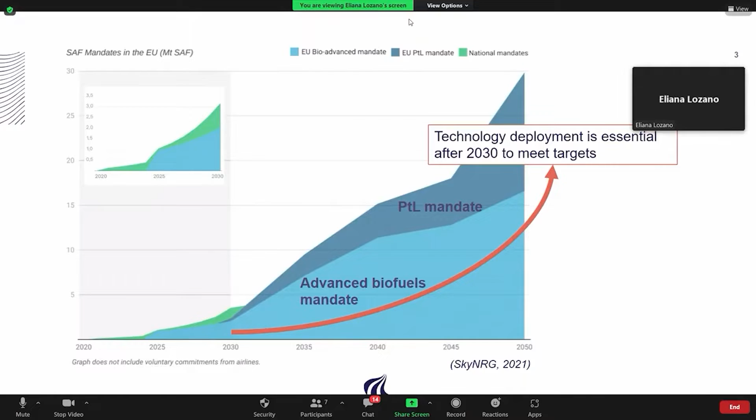Advanced biofuels being used as transition fuels, and also the power to liquid fuels are going to be there. But the challenge right now is that there are not too many advanced biofuel technologies that are at a commercial scale, at a commercial level. So there are quite some at the demonstration scale. And the challenge is then to bring these technologies up to commercialization.

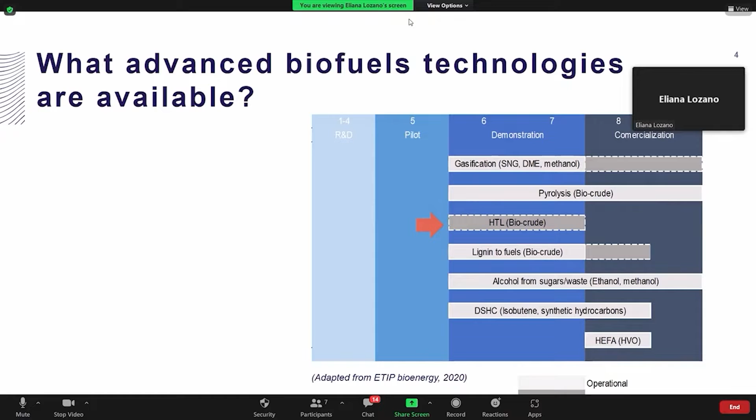So I'm going to talk about the HTL technology. This is hydrothermal liquefaction. Very briefly, it comprises two main steps. So we start with the biomass, and for my PhD, I work mainly with forestry residues and sewage sludge. In HTL, we have the presence of water, and we use it at very high temperatures and pressures to produce a biocrude. And therefore, we need hydrogen to increase the quality of this biocrude and to make it suitable to be used as transport fuel.

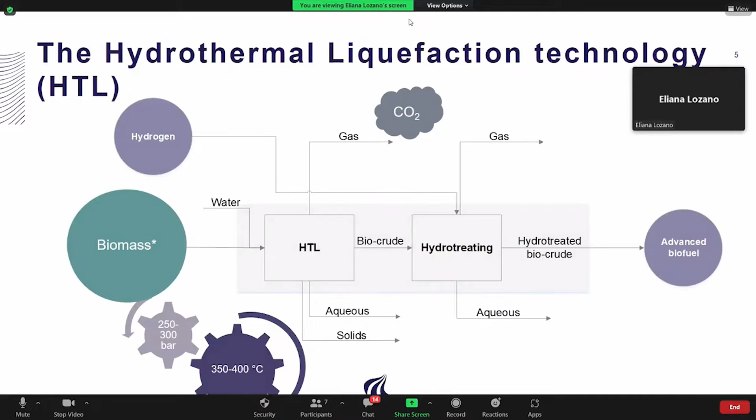So going to commercialization, of course, we're interested in how this technology can be integrated into the system. It's not only about the biofuels, but also other products that we can integrate, such as excess heat, CO2, and also other materials that can be of use. Literature until now on HTL has focused a lot on the biofuel product. So trying to estimate what is the minimum fuel selling price and how competitive it can be with other technologies.

But there is a lack of studies that, for instance, look at the CO2 product, which is an interesting topic for carbon capture and utilization or storage. So we know power to X and negative emission technologies are expected to play a big role in the transition. Also, excess heat from the process can be used for sector coupling. And during my PhD, I'm working on these aspects to see how these other products can have an influence on the minimum fuel selling price. So I'm doing a techno-economic analysis.

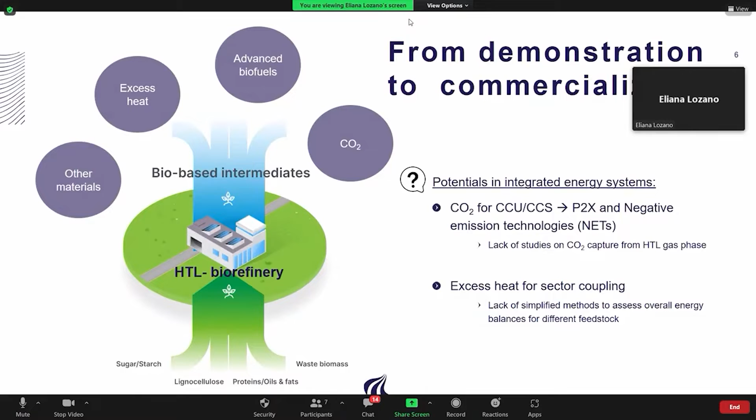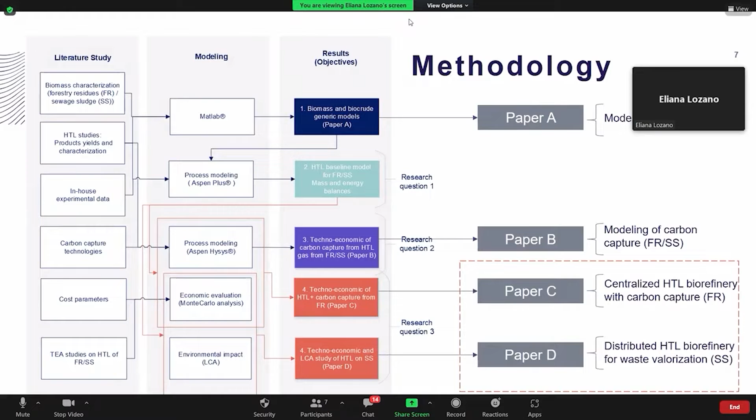So as a result of my PhD, I have four journal publications, 3 of them already published. And today I'm going to tell you more about the last 2 due to time limitations. But these last 2 publications integrate also the results of the first 2 papers. The first one was more in modeling of the technology, the carbon capture step in the second paper, and in paper C and D, I did a modeling of a more integrated version based on the forestry residues and on the sewage sludge. So I will start with paper C.

So as main products here, we have the CO2, and we also use the Selexol technology for cleaning hydrogen, which is needed in excess in the process. So this hydrogen needs to be recovered for the economy of the process. And we also evaluated the production of excess heat. So the main question to answer here was: what is the impact on the minimum fuel selling price and the greenhouse gas emissions of coupling the carbon capture step in the process?

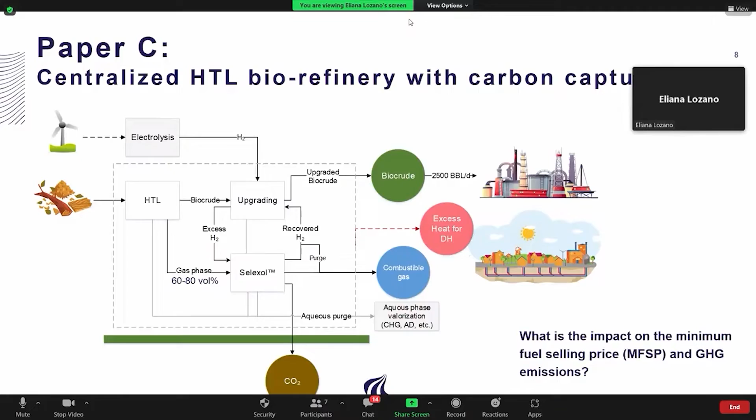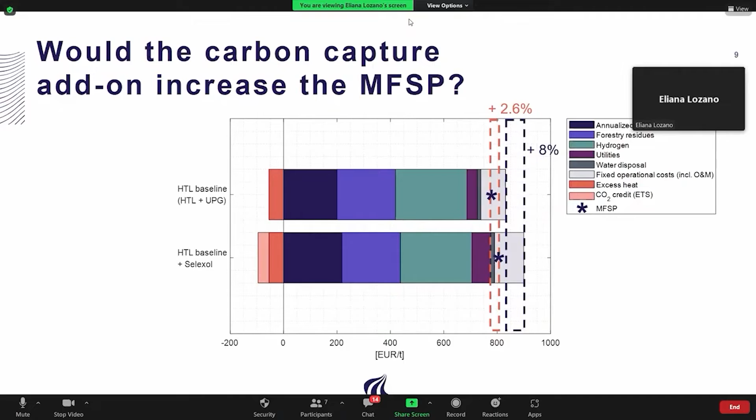However, when we include the revenues from the CO2 credits under the Emissions Trading System, we see that the initial increase that we estimated at around 8% goes down to approximately 3%. So this is, of course, something that is not too bad, 3%, but it depends on the CO2 credits and also how much heat we can actually integrate with the system. This is for a base case.

We look at it also in a range, with different minimum and maximum values for different cost parameters. So the result is an impact between -2 and +5%. So it's still within a 5% increase.

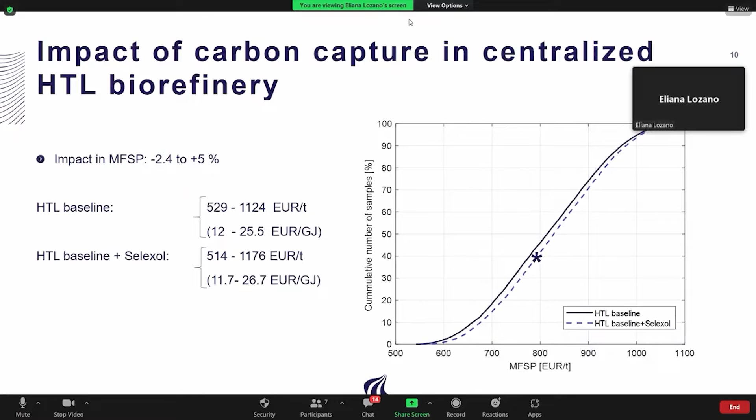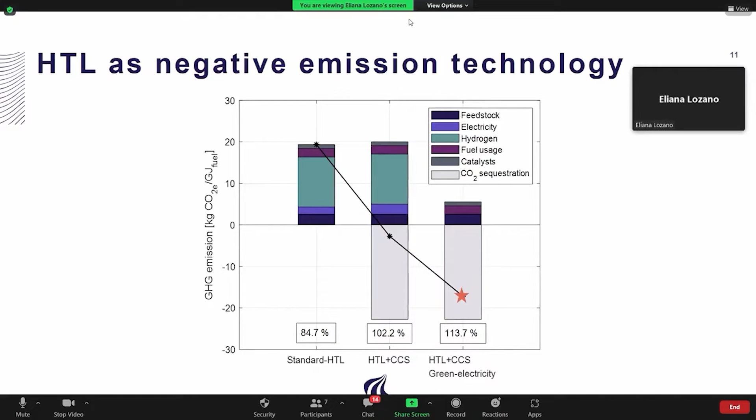And in terms of the environmental performance, we see here for a standard HTL without carbon capture it is in the order of 85%. The big part here is the hydrogen, which still has some contribution due to the electricity emission factor. But in a scenario where we have completely green electricity and we can capture and store the CO2, this technology can perform as a negative emission technology.

The result is also in the same range as what has been published in other papers, even though there are not so many at the moment. We see it's in the order of -20 grams of CO2 per megajoule of fuel.

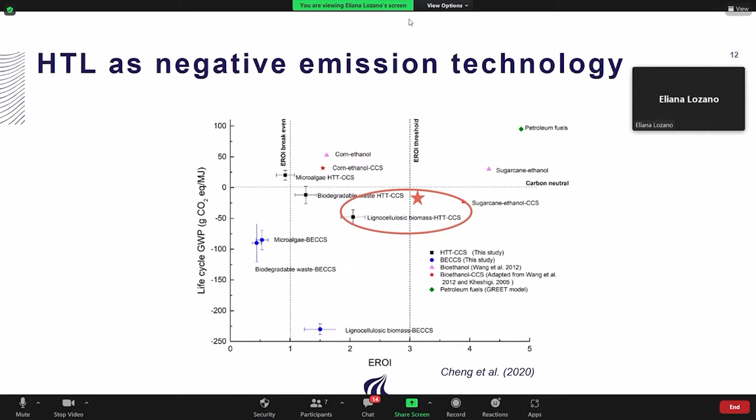Yes, so I'm going to talk about paper D. The last paper is about sludge valorization in an HTL biorefinery. In this case, we look at a distributed configuration of HTL plants, having the Netherlands as a case study, and using the fuels for the marine sector. Again, we look at techno-economic assessment and also environmental performance relative to business as usual, which for this case is mono incineration.

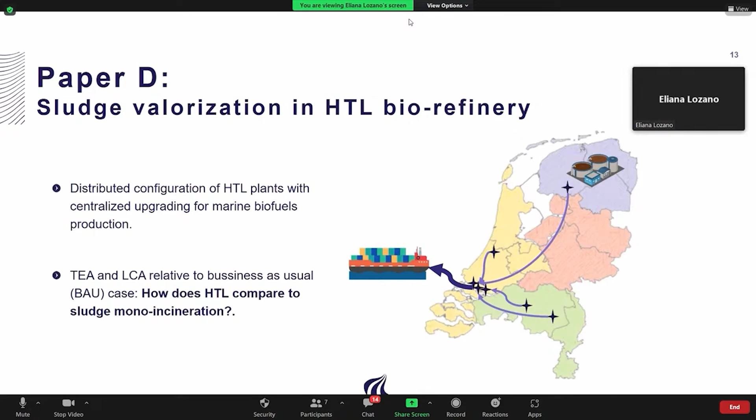So briefly, an introduction on sewage sludge treatment. This is a byproduct from the wastewater treatment plants. It contains organic and inorganic matter, but also contains some things that we wouldn't like to have, such as contaminants, microplastics, pharmaceuticals. So in general, at EU level, there are different technologies that we are using right now to treat or to dispose of this byproduct.

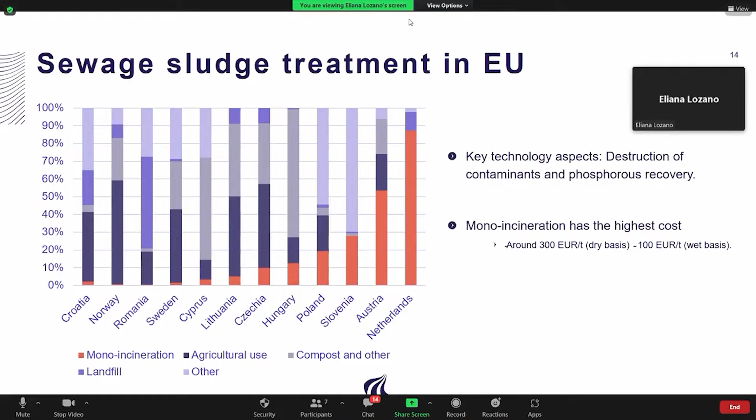Key technology aspects for sludge are the destruction of contaminants, as I already said, and more recently the issue of phosphorus recovery. I think Matt already talked about this before. We need to recover phosphorus from the sludge. Mono incineration is one of the technologies currently applied that is very effective in the destruction of contaminants, and also enables phosphorus recovery in a later stage, but it has the highest cost. For the Netherlands, it's also the dominant treatment technology, as you see here, but it's quite expensive.

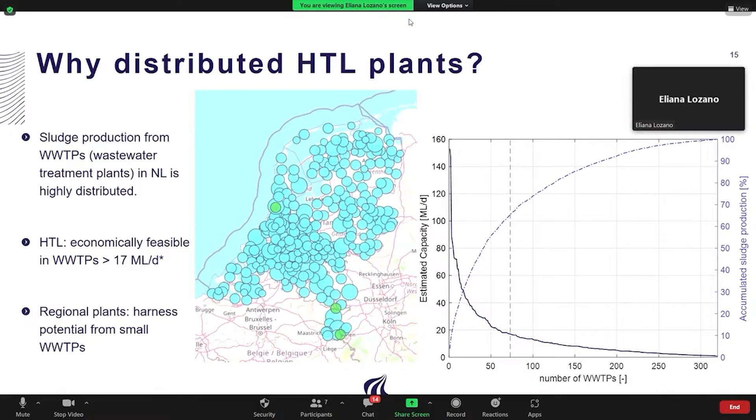So we studied distributed plants here because production of sludge is already distributed. There are a lot of wastewater treatment plants in the Netherlands, which you can see in the picture. Previous research has indicated that implementation is not economically feasible in small plants. So approaching a configuration of regional plants is important to harness the potential of all the plants.

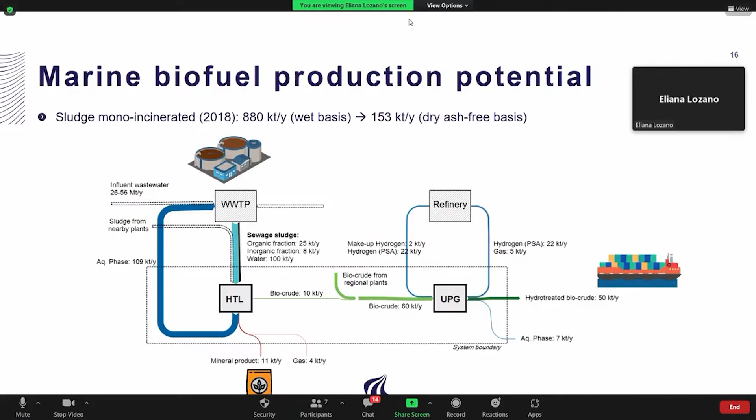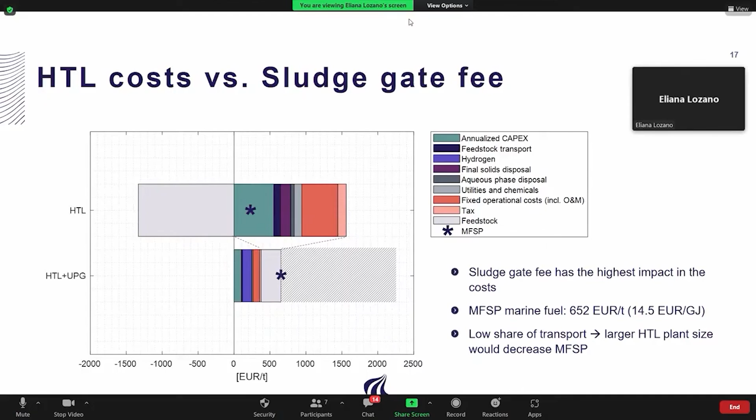Something interesting to see here is that transport has a relatively low share, so we could even try to increase the plant sizes in order to decrease the minimum fuel selling price further. Again, Monte Carlo shows that we are in a range.

Yes? Considering the time, I would like to ask you to try to move to the conclusions. Yeah, this is my last slide. Okay, perfect. Carry on. Okay.

So here you see more or less the range. Because we have below zero in some cases, this indicates that there is potential for a more economic treatment compared to mono incineration. And this is finally the environmental performance, but I'm not going to talk about it. Maybe we could leave it for further discussion if someone is interested.

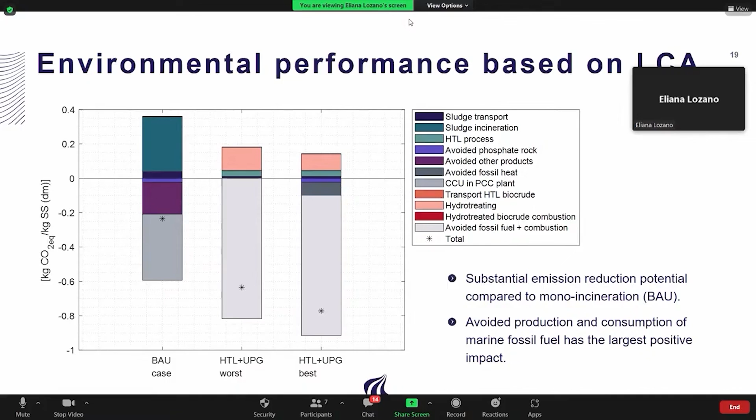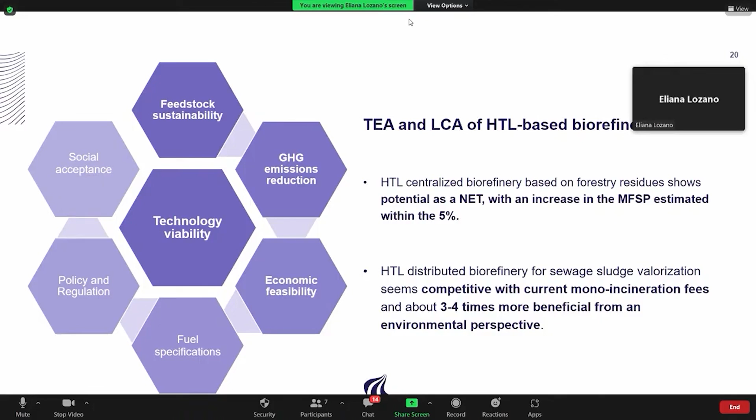So the main conclusions of my studies are that HTL has potential to be a negative emission technology without a significant increase in the minimum fuel selling price, and also for the case of sludge treatment, it seems to be competitive with mono incineration fees, and also more beneficial from an environmental perspective. Thank you.